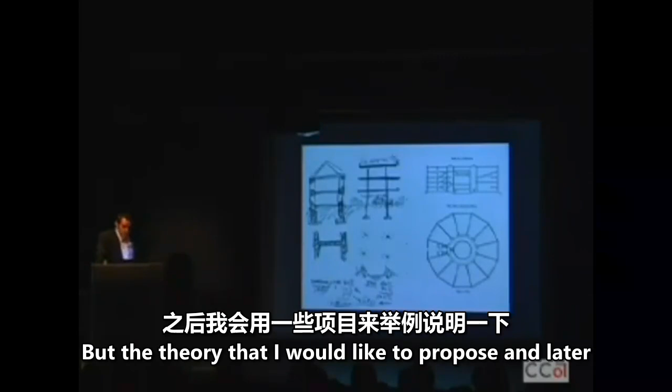But the theory that I would like to propose, and that later on I will illustrate extensively with the projects of the office, is one that if in the past the architects who were addressing some sort of political projects were relying primarily on the section and the plan as the architectural devices that establish contiguities, adjacencies, hierarchies, and so on and so forth in the society that the building is hosting.

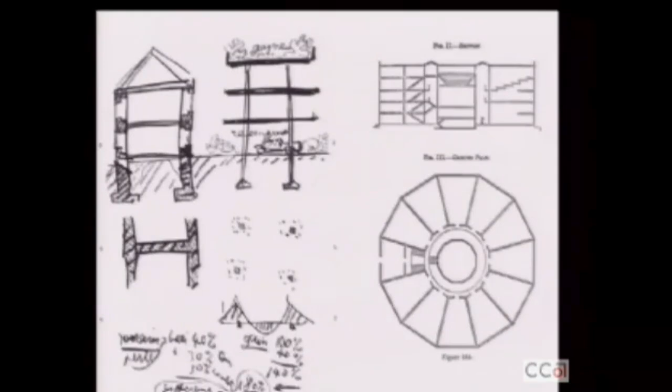My theory here is that in the near future the envelope is going to become even more important than these elements in terms of shaping, in terms of acting as a political agent. Why is that?

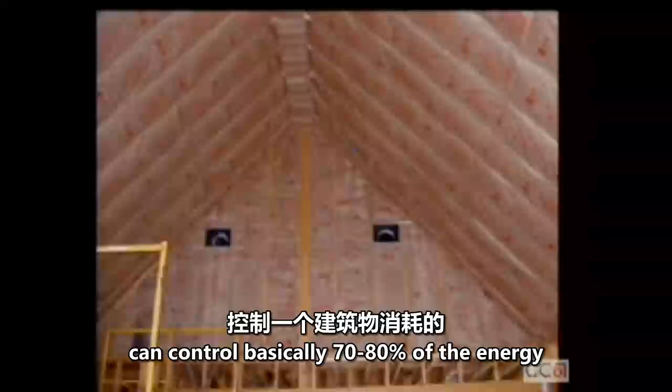Then there are other reasons why this element is important. Climate change. The building envelope regulates or can control basically 70–80% of the energy that a building consumes, and therefore it becomes a crucial decision in terms of how the building performs. The building envelope also has undergone in the last few decades a process of technical development that now makes very similar the technology that builds roofs and the technology that builds walls.

So where just a few decades ago you would use entirely different technologies for these two elements of the envelope, now you see that curtain wall technology or light metal cladding technology is increasingly an element that you use for the walls and the roofs, and so that means that perhaps we need to start theorizing and rationalizing this element as a whole envelope rather than as a facade and a roof or a facade and a silhouette, which is maybe the way in which it has been theorized in the past.

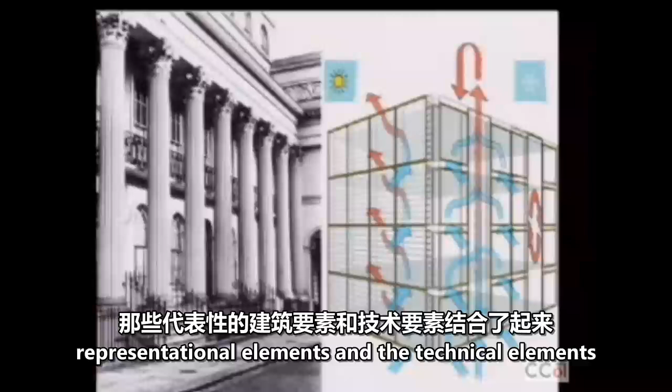Hopefully bring together those kind of representational elements and the technical elements that regulate this homeostatic membrane between inside and outside of the buildings to make a more general theory of the building envelope. So as a kind of structure of that theory, I will be using this classification to categorize the projects from the office that I will show later.

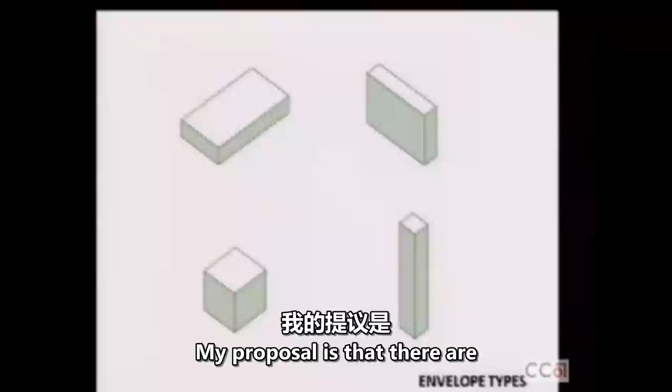My proposal is that there are 4 basic types of building envelopes, and depending on each one of these types, which are basically aspect ratios between dimensions of the envelope, they enable or they are more prone to engage on certain types of concrete matters with political significance.

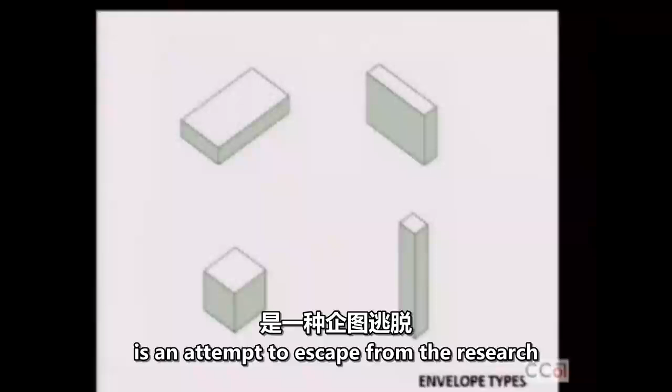And maybe I should say also the whole theory of the envelope is an attempt also to escape from the research on the pure surface, on the pure treatment of the skin, and start to draw relationships between the constitution of that skin and the wider problem of shaping the envelope of the building. So some skins are more adequate for certain types of envelopes, and so on and so forth. And so there are these 4 types, which I call flat horizontal, flat vertical, spherical, and vertical.

So I'm now going to move quickly to explain each one of them and possibly what are the main arguments, or the main possibilities that are predominant in each one of those types, using our own work rather than as an example, because I think that perhaps they are not the best example of what we can do with these different types of enveloping structures today. As a sample, I mean, I've discovered the subject by actually looking at the projects that were going on in the office, and I think as such they should be seen, not as examples of best practice in this future theory of the building envelope.

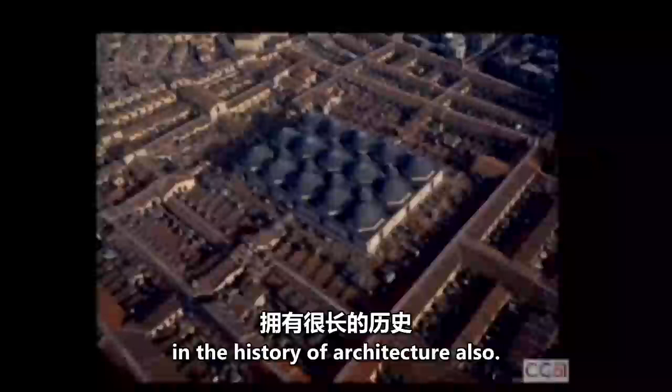So what is called flat horizontal, you all know what kind of buildings they are. They have a long history in the history of architecture also. They are sometimes also treated as a kind of utopian dream. But what I think makes them interesting as possible political or socially transformational devices, I don't know if that makes any sense, but as devices that we can use to transform reality, is that they are usually covering a large surface with a constant section which usually hosts movement of goods and exchange in a certain location, and that is a type of activity that is obviously central to the formation of communities.

At the same time, these types of envelopes are usually so large that they require certain ways of bringing daylight in and bringing natural ventilation in, and they are so large that very often you see that they swallow pieces of nature. I mean, it's not uncommon to see how people who design airports or shopping centers, which are some of the examples of these typologies, tend to replicate nature in a very picturesque way inside of those buildings.

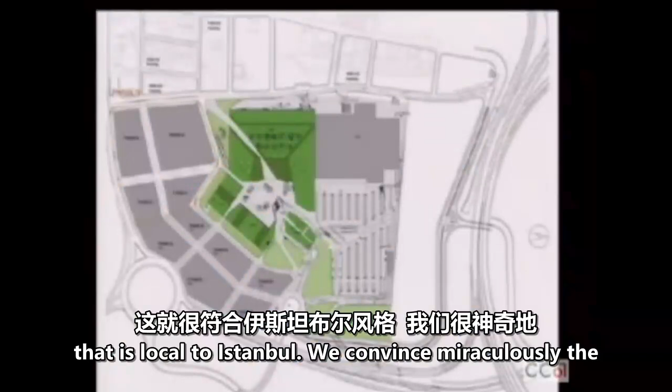We were going to merge with the camouflage, with the colors, the palette of materials that is local to Istanbul. We miraculously convinced the client to explode the box. There you see our building next to IKEA, to put the parking underground in order to lose that reference to the surface of asphalt that is customary in this type of development, and even to suggest the possibility that at some point the envelope breaks and maybe initiates surrounding fabric rather than remaining as an isolated object in the urban field.

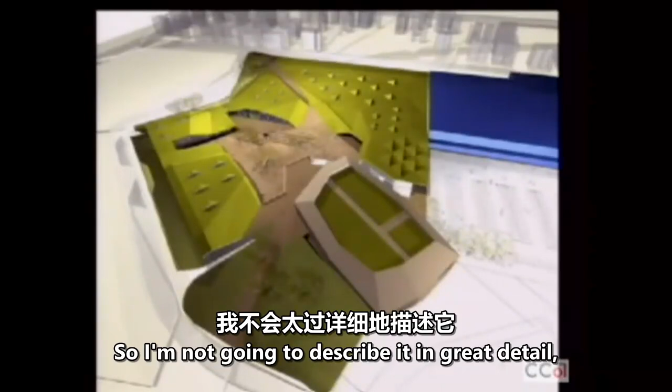So I'm not going to describe it in great detail. There are some of the first iterations of the project, where we were trying to activate also the roof, as I was saying before, as a device that will, as opposed to IKEA, bring daylight and natural ventilation inside of the spaces, but also as a device that can be used as a new park, as a new ground, and relates in different ways to the edges of the complex. So there you see the section of IKEA and the section of our building and what it does.

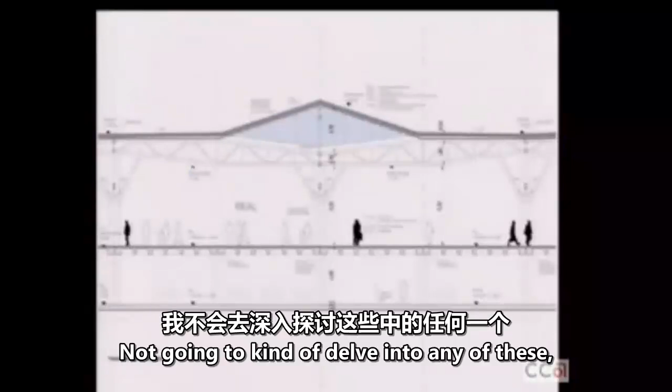I'm not going to explain the building. It's a very large building. Just to show you a few images of how the building is built with this very reductive palette of green and clay, and how the roofs become almost like a new park, and also how that new park challenges the definition of the horizontal, the ground. So by becoming closer to the ground, you are more able to challenge it as a cultural element. Not going to delve into any of these.

The issue of relating the natural and the artificial: the use of the skylights for natural ventilation and daylight inside of the building is also used as the device that generates the topography on top of the building, and this is how people use the areas on the building and the ground. I mean, these guys don't know it, but they are on unstable grounds.

Second project is a project that we are developing now in Birmingham, in the center of England, and this is a project that actually could be one of these non-profit projects that represent society, but the way it was given to us was absolutely perverse in the sense that the real project, which is the redevelopment of the station, is given to a corporate company that is doing it, and we are given about 5% of the total budget to wrap the building and make it look good.

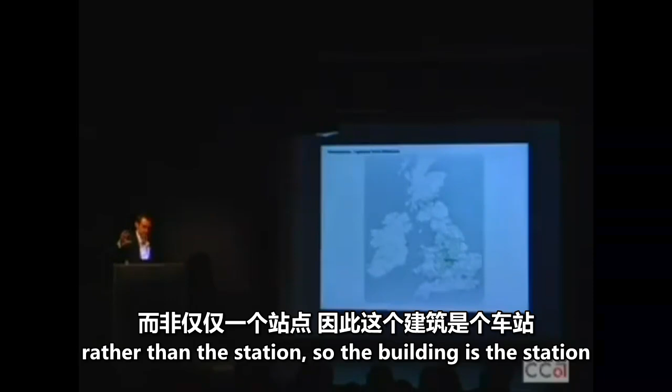So the building is a station, but the station at the same time is the symbol of this kind of transport hub, which Birmingham is. And so

This is not working. I can see it here, but you cannot see it there. Anyway, I think we can move on.

It looks as if the animations are not running, but basically what we did was to identify in the immediate field of the station a number of elements that were moving and were somehow related to that center of the city that is defined by movement, and try to see how we can make them part of the facade. And so those were the tracks; if you remember, the building is surrounded by holes because the trains are going underneath, and these holes need to be open. So there are trains, there are commuters coming in and out. This is one of the busiest stations in Europe.

Then there is information that is changing and can also be attached to the facade, and then there is an element: Birmingham used to have a famously black sky because of the steel industry and the bad weather in general, and now between heavy industry moving to Korea and other places and global warming, it has a kind of beautiful sky that we wanted to celebrate.

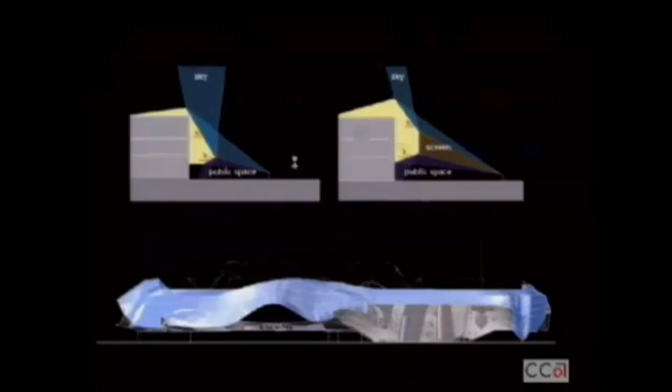So we made a number of sections. You see the blue things are the halls where the trains are located, and you see that every one of these sections has different distances between where the public is located, because sometimes you are looking at the station from beyond the hall in front of the station. Sometimes you are next to it, and so these conditions of reflection change from one section to the next. Sometimes it becomes very complex. Sometimes it encloses or embeds the screens.

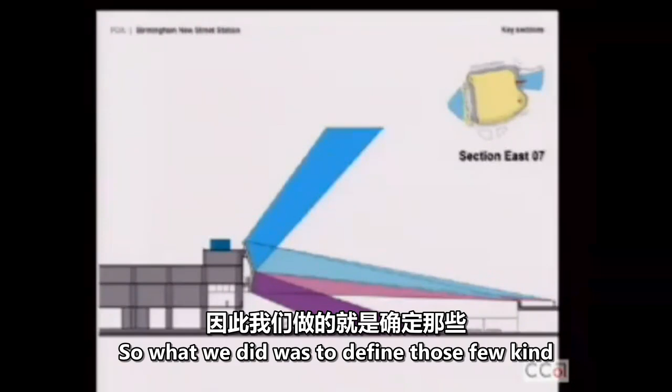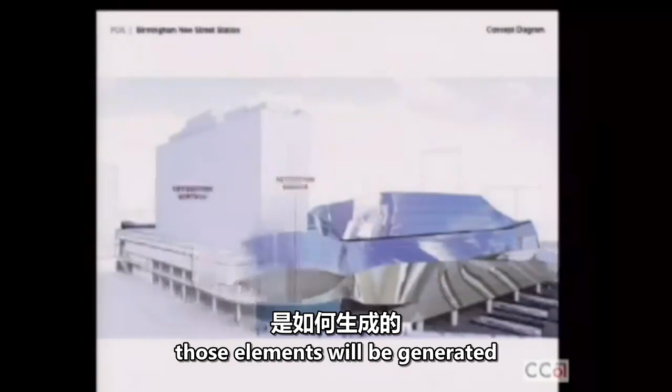So what we did was to define those few crucial sections, and by morphing them, we generate the skin that will represent, if you want, the building in the future. And so that is how that surface that reflects those elements will be generated and will perform in the future.

It's a kind of rain screen that is supposed to capture also the changes in light that occur in the center of Birmingham through the day, capturing the different solar conditions, but also artificial lighting, etc. So these are some of the images of this project as we imagine it will be. It is starting construction now.

And there is another animation here where you can see this idea of a kind of Koyaanisqatsi type of fresco, where you have the clouds reflecting and the trains moving and all these kind of things inside. Unfortunately, you cannot see it, but you can imagine.

So the second category is the spherical category. Spherical doesn't necessarily mean spherical. It means that it's a category of envelope where the three dimensions are more or less similar. I call it spherical in honor of Sloterdijk, who is one of the people who inspired this research.

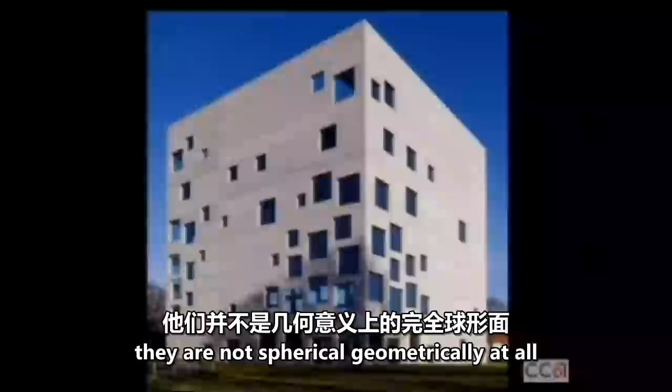So these are, for example, contemporary spherical buildings following my own theory. Sometimes they are not spherical geometrically at all, but you see that they have more or less the same dimensions in every direction. This is a typology that has been used often as a kind of ideal visionary typology, I think primarily because it doesn't really work unless you have massive air conditioning, because the relationship between the inside and outside is very tenuous.

And that's precisely what is interesting about this typology, and what possibly generates its potential in terms of representing or embedding a certain type of culture and possibly transforming it: just in virtue of its geometrical qualities, it has the lowest envelope ratio of all. If you divide the number of square meters of the envelope by the number of cubic meters contained inside, this typology is always lower than any of the other ones.

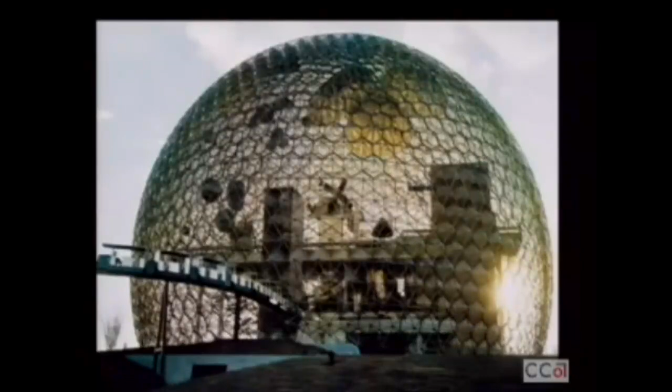And what does this mean? It means that the skin is much more independent from what happens inside than in most other typologies, probably with the exception of the vertical side of the previous type, where that kind of relationship is very tenuous.

But also because of the nature of these envelopes, normally they are public buildings. They are buildings that have a variety of functions. They are not just the repetition of a section on the ground to host a market or a retail center or the handling of passengers of an airport, or, for the vertical typologies, an optimal bay of space used for residential or commercial functions. You can imagine them as libraries or auditoriums, this type of buildings.

So they are buildings of public nature that usually require an additional level of concern with how the building represents and communicates what happens inside. So it's a type of envelope that has a very high level of request on a representational level and a very low level of request on an environmental level. And I think that its political potentials also have to do with those parameters. It's a typology that is often used by architects to play.

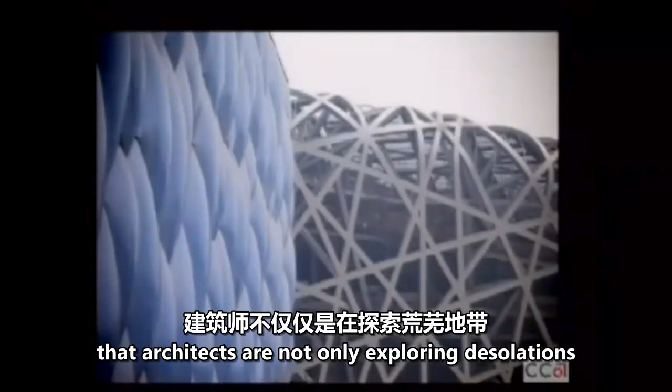It enables architects a great deal of freedom in terms of surficial experimentation, and so you see architects delving into all kinds of experiments that have nothing to do with the functioning of the building, but primarily with communicating the organization to the outside. In many of these experiments architects are exploring tessellations or technologies that probably didn't exist 20 years ago, or at least were not affordable, like silk screening, layering the functions of the surface in entirely new ways, using CNC technology to produce these tessellations and so on.

So what you see in all these examples is some sort of latent desire of architects, and probably of the societies where they work, of producing organizations that are consistent and yet differentiated. My favorite case is the Olympic buildings in China. You can see that invariably, no matter which architect works, it ends up with the same recipe for the envelope, a pattern that has a differentiated nature.

And think what that means in terms of political message. We are still able to do big projects. We are still one, but as opposed to the Mao years, where there was a kind of suit the same for everybody, we are becoming sensitive to differences, to individuals and so on.

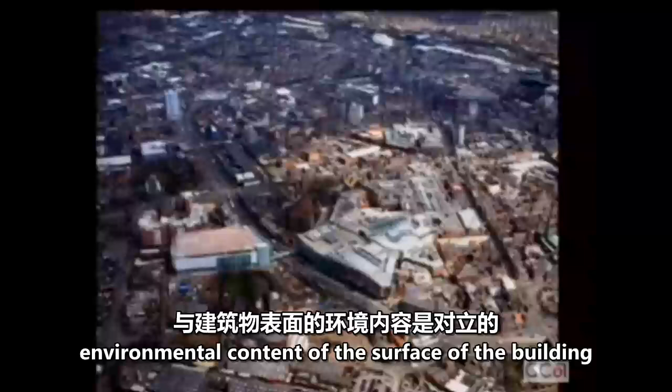They are buildings for profit, they are not public buildings, but two projects that we've done that have a research that has to do with this representational content as opposed to environmental content of the surface of the building. This is a project that we finished a couple of years ago in Leicester, also in the Midlands in the UK, where we had to make a cineplex and a department store as the anchor of a redeveloped shopping center, and we basically were given this plan.

We were able to kink the surface a little bit, but not very much, because they already had outline planning permission, and we were told to simply make these two functions there. We did design the structure and everything, but we didn't do anything. I mean, it's irrelevant. What happens is kind of correctly done by the office, but the brief of the project is so constrained that there is not much you can do inside of there.

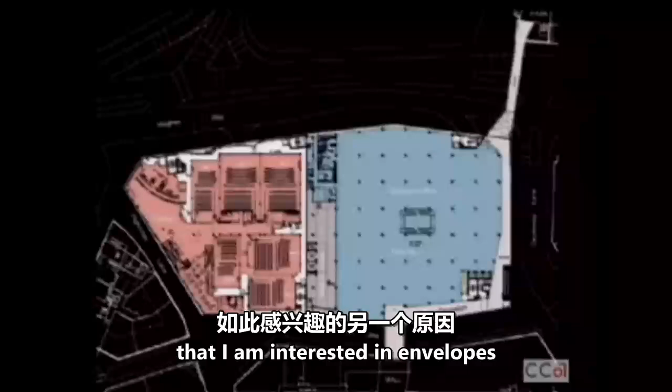And in fact, this is another one of the reasons why I'm interested in envelopes, because I identified it as probably the last domain where architects have some power. In all the other areas you get retail experts and cinema experts and housing experts and so on and so forth, and they know exactly what to do, so there are very limited possibilities of operating with the plan and the section as architects in the past did in order to transform reality, and we are now constrained to the skin.

So in this case, the argument was, okay, there is John Lewis, which is a kind of generic British department store, and an American cinema operator who have to occupy the building. But what we wanted to do was to relate the skin to some of the historical contents of the city of Leicester, as one of the important cities where there was textile industry in the 19th century. John Lewis is also a company that has a long tradition of hosiery and lace. So in a way, we turned that into the message that the skin was going to convey.

And so we managed to convince the client to do this kind of very expensive skin. It's a cheap project, but in this case it turned out to be expensive: 2 layers of silk screen glass with a drawing that was selected for its geometrical qualities of coverage, a geometry out of the archives of John Lewis. And then we redrew it in order to make a number of tiles.

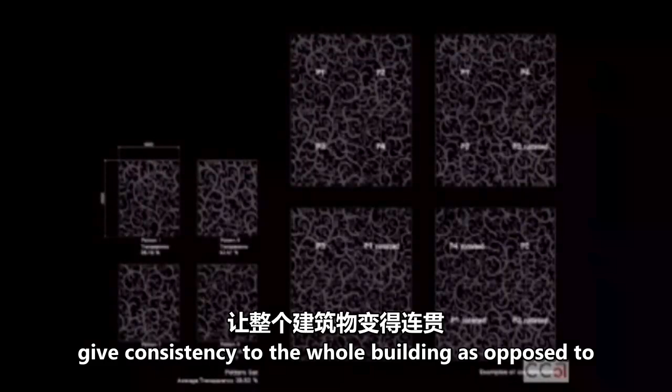It is 8 tiles that by mirroring them would enable us to first give consistency to the whole building, as opposed to what happens normally with these buildings, which are blank envelopes where the architects are usually forced to make a kind of collage, like you paint this blue and you paint this gray and you paint this yellow, and the whole thing looks a little bit like the scale of a city. Here it was almost the reverse of that. We turned everything into a single floating lace box, and then we differentiated.

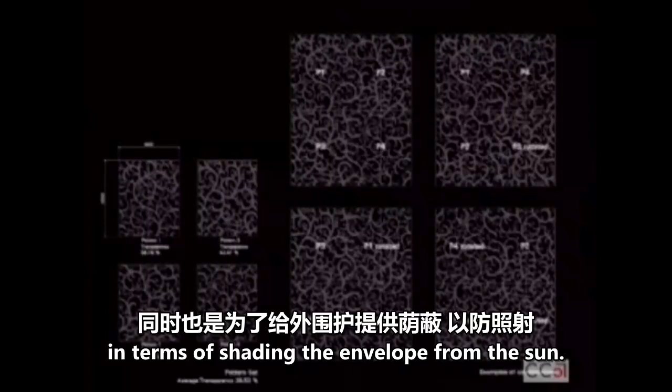We differentiated in order to provide areas of higher and lower transparency, both for the visual relationship between inside and outside, but also in terms of shading the envelope from the sun. So you see, the pattern is manipulated, and by this manipulation we can provide more or less density, and it is shaped to kind of embrace the heads of the people inside. This looks silly, but it is not, because when you look from inside, you see through at the height of your head, because there is an overlap of the 2 patterns. But when you look from outside, you see that the 2 patterns overlap, so the view is obstructed. This is how this facade works.

So in a way, here the pattern challenges the unitized system of the facade with this silk screen lace that can adjust different densities. And so these are some photographs of that envelope, which, because it's mirror frit, sometimes picks up the neighbor, sometimes reflects the sky, sometimes becomes more opaque depending on whether the sun is or is not hitting it, and at night produces these sorts of lace effects as if it was a kind of Chinese lantern that changes color.

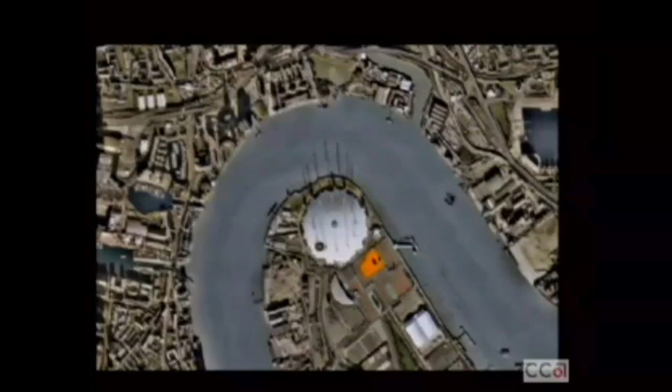Second project on this category of spherical is a project that is now under construction in Greenwich, in front of the dome, in that orange area, and it's a building that looks like this. It's a School of Design and Communication, and it's a building that is located in front of the dome, and it has to adjust to a kind of crescent-like urban regulations surrounding the dome, which we turn into kind of kinked, jagged form that works better with the function of the school to happen inside.

But I think what is interesting in terms of this discussion is that because of that position right in front of the dome, which is a massive blank object in the field, we started thinking from the very beginning in the possibility of doing something that almost doesn't look like a building. It looks also like some sort of container, and being the school part of the arts and crafts tradition, we thought that maybe a possible idea would be to use wallpaper as an envelope, kind of these floral wallpapers of William Morris.

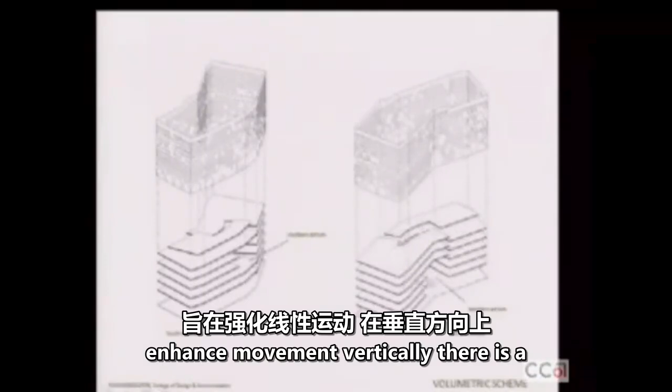So the building became that container that was largely dictated by the local regulations. There are some interesting things in the section because we have a system of split levels that is aimed to enhance movement vertically. There is a sequence of atriums, but we are not going to talk about that. We are going to be focusing on this idea of some sort of silo, wallpaper silo that contains the school in front of the dome.

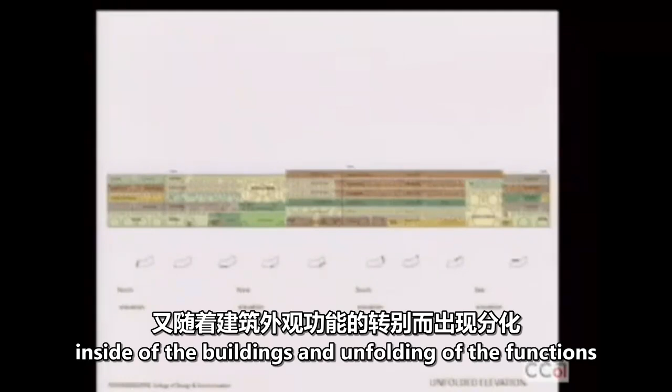And again, this latent desire of all contemporary architects of differentiating buildings. In this case, the pattern of fenestration is differentiated following the different functions inside of the building. It's an unfolding of the functions attached to the facade.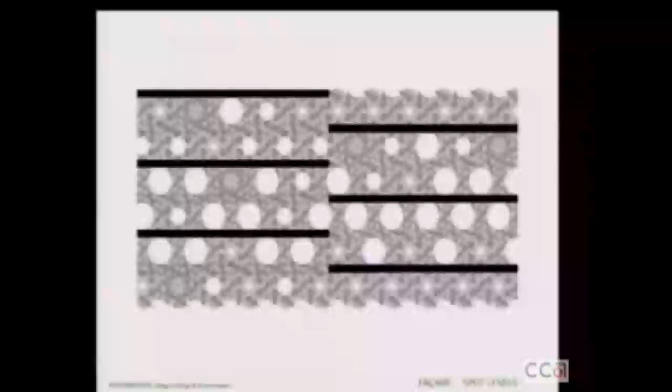So you see also that there's a challenge to the conventional type of spherical envelope. In this case, what we are doing is to try to reconnect the inside and the outside, to use this membrane not as something that is a kind of free floating representation, but on the contrary is something deeper that relates to the programs and to other issues you will see later on. So this is a split level system that produces a double fenestration inside of the studios. This is very much like an architecture school, except there is not a lot of architecture, but similar things.

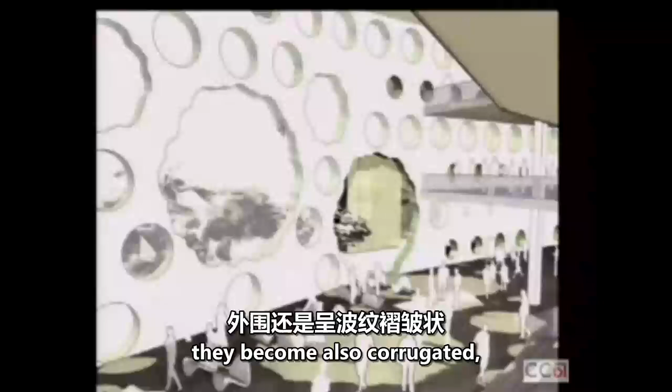These two levels of windows are able to change in order to provide the flexibility of having different types of perforation of the envelope. You see, when the windows become larger, they become also corrugated. You will see later on why. Because of this. These are the floral tiles, the floral petals in the wallpaper, but instead of replicating nature, they are made with this non-periodic, non-regular tessellation invented by a British mathematician called Roger Penrose, that allows us to cover the field just by using these different tiles.

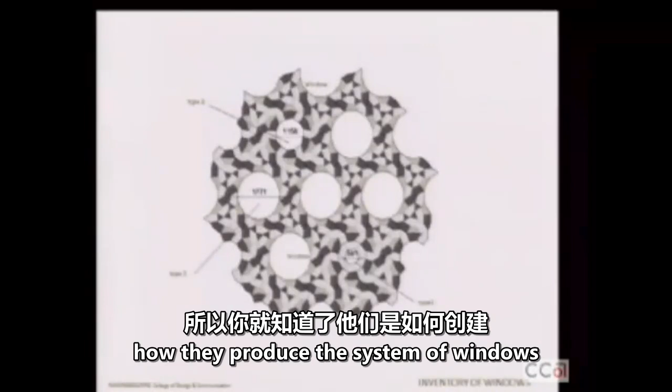And so you see how they produce the system of windows that make the building, and why, when this becomes larger, the edge of these roses becomes dictated by the tessellation system of the envelope. And you see what they do in section, and what is interesting, I think, about the system and how it links the ornamental quality of the skin with the function, which is dictated basically by the size of the window and by the position of the section.

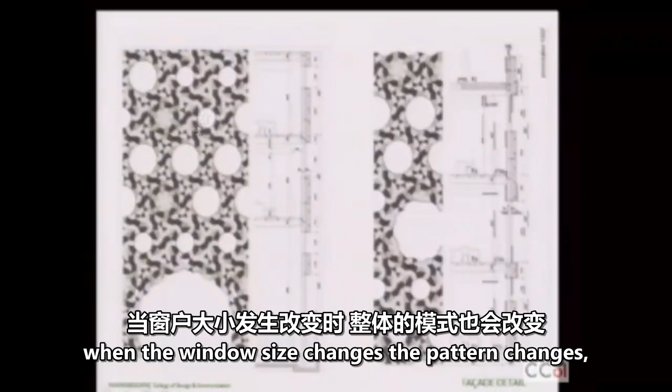You see the section always including two sets of windows, but you see that when the window size changes, the pattern changes. So the pattern is different around here, and this occurs automatically when we color code every one of the tiles in respect to the polar center of this polar array, these roses around every one of the windows. So this is what happens. You see how the pattern changes as the window size changes. This is a one-to-one mock-up to test the facade.

Next category. Are we already running late? Very late? We're okay? Okay, sort of okay. Okay, if it becomes really embarrassing, let me know.

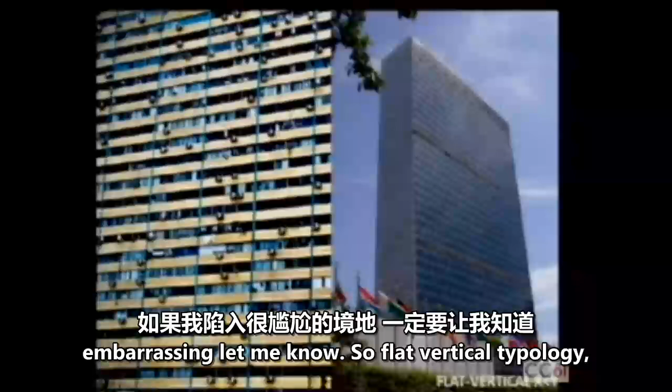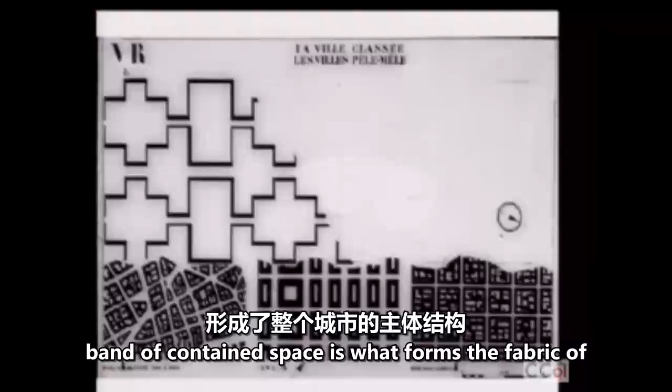So flat vertical typology, you all know this type of buildings. They are buildings where there are two dimensions, one of them vertical, that are much larger than the other one. The fabric of the city, basically after the Enlightenment, is built with this typology, which replicates and optimizes depth of space for whatever functions are required, and the repetition of that and the configuration of that band of contained space is what forms the fabric of the city.

And that's, I think, one of the first important potentials of playing with this type of envelope, which is how the envelope relates and defines public space, and how it distinguishes open public space from private public space, for example, in the case of traditional cities. You can see interesting examples of this. What happens when this envelope is used by the welfare state in Europe? This is Toulouse-le-Mirail.

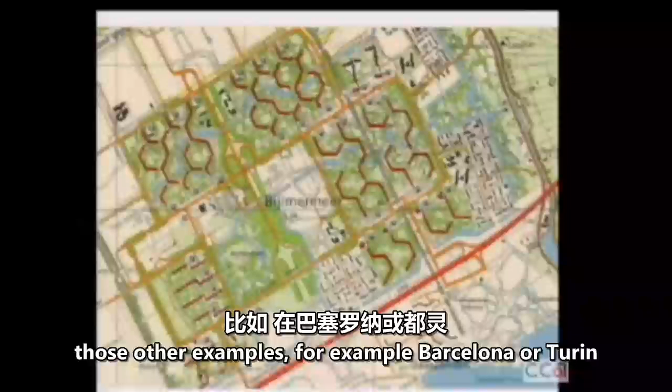You see the blocks suddenly have no front, no back. The public open space has occupied the whole ground of the city. I mean, some of these things in Bijlmermeer are doing the same thing, as opposed to those other examples of, for example, Barcelona or Turin, where the block is actually dividing the public space from the private open space.

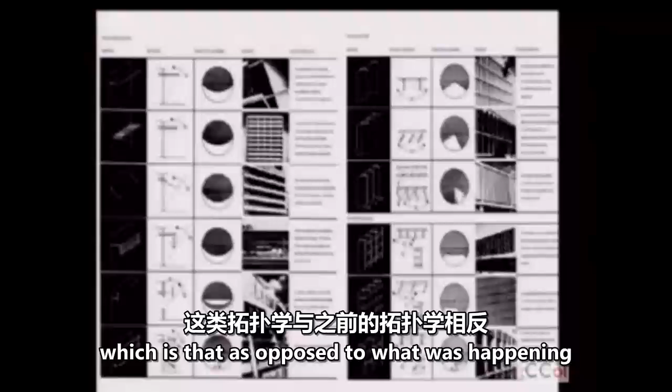So I think that this is, first of all, one of the most powerful things we can do when deploying this typology, which is to consider how it relates to the space of the city. But this typology has also another very interesting potential in terms of transforming the society that inhabits it, which is that, as opposed to what was happening in the previous typology, where the skin is basically independent, in this typology, the figuration of the building and the environmental performance coincide or collide in that

superficial envelope. So as opposed to the previous ones, here that is a very active skin that regulates the climatic exchanges, and at the same time it is also what makes the face of the community, and sometimes represents very directly what that face does, sometimes insisting in the independence between the cells of the individuals that compose the building, sometimes insisting in the industry, in the system that produces those envelopes.

And lately you see again all these experiments trying to show that the communities that inhabit those envelopes are differentiated, are not just exactly the same. I mean, you see examples like this, where that is very intentionally deployed. Almost, I think today it's impossible to do a building that is totally repetitive, because people will understand that it is politically incorrect. So how that differentiated skin relates with climatic conditions and so on and so forth, I think is a very exciting field to explore. And we explored it in a housing block that we built in Madrid, in the outskirts of Madrid.

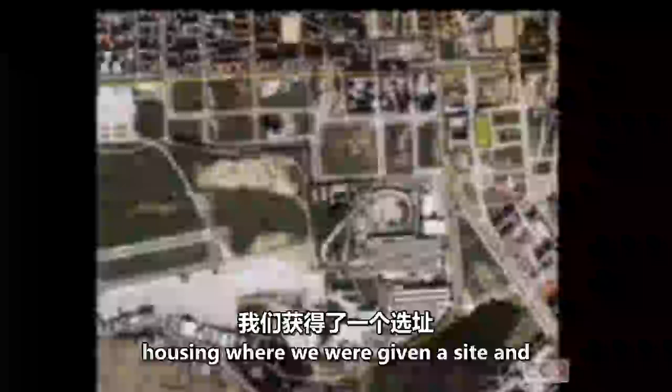This is kind of very cheap social housing, where we were given a site and we decided to concentrate all the FAR in one side of the site, so that every unit will have a view of a private garden and a public garden on the other side that existed there. So in order to do that, and we had a kind of limit of height, we needed to resort to a very deep space, and that gave us the idea that maybe because we have a very low facade ratio, we can try to produce social housing made out of glass.

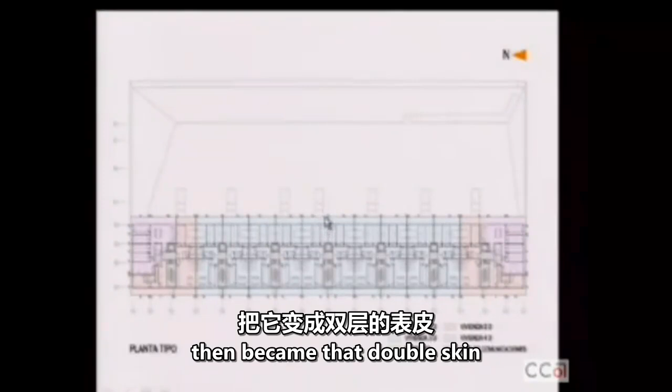But then realizing that we were in Madrid, and that the building is oriented north-south in this direction, so this is east and west facade, we needed to introduce some kind of solar shading device that then became that double skin, which produces terraces for every unit, and acts as a kind of climatic buffer. You also see that the units have double aspect, so that enhances cross ventilation, etc. So these are the units. We are not gonna look at them.

This is the skin, which is based also on some sort of local shading device that the windows in Madrid have. But the particularity of this experiment is that these windows are going to be made with bamboo or some sort of local variety of very cheap material, which produces this. So this is the finished project, and what is, in my opinion, more successful about this is that it doesn't have to resort to this type of collage. Like, here you see where architects have to invent all kinds of things to escape from regularity.

In this case, everything is consistent, everything is regular, and yet the fact that people move the louvers differentially to accommodate to their desires produces that changing and differentiated picture of collective desire on the facade. That is not just a picture, is not just a collage, but is produced by actually having some kind of environmental performance. These are simply these terraces wrapped in bamboo when they are open, when they are closed.

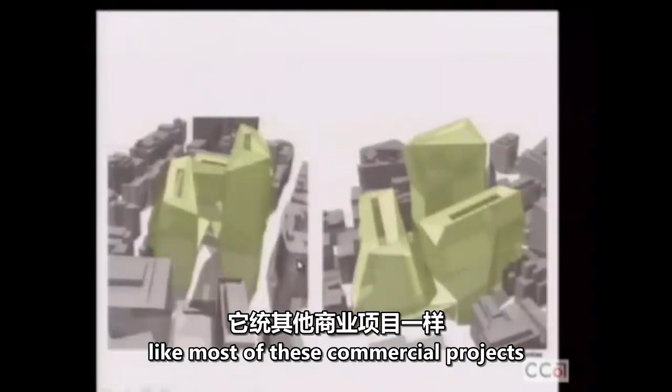The other project that I brought very quickly is a project that we designed in the city of London, in this location here recently, and is now on hold, like most of these commercial projects, waiting for the credit to come back. But it's basically 3 central core buildings, very conventional office buildings that for different reasons, for view corridors and daylighting conditions, shadows being cast on the neighbors, adopt this form, which is a kind of crystalline form. It's like 3 little jewels in a cluster with this form.

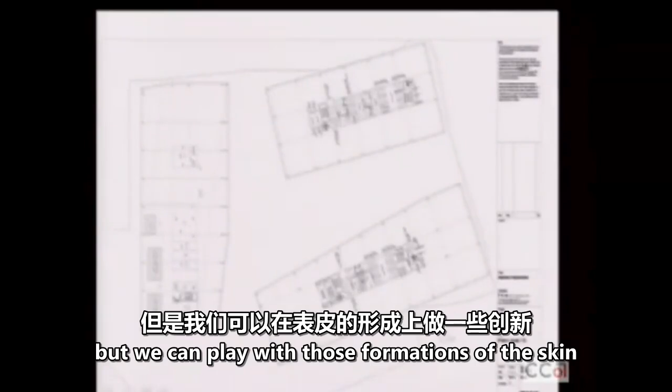So what is interesting about what we did here with the envelope, these are some of the plans. You see, it's a relatively, again, conventional inside. There is nothing we can do there. It's a commercial project. We cannot change, but we can play with those formations of the skin in order to produce the architectural expression of the project. But not more than that.

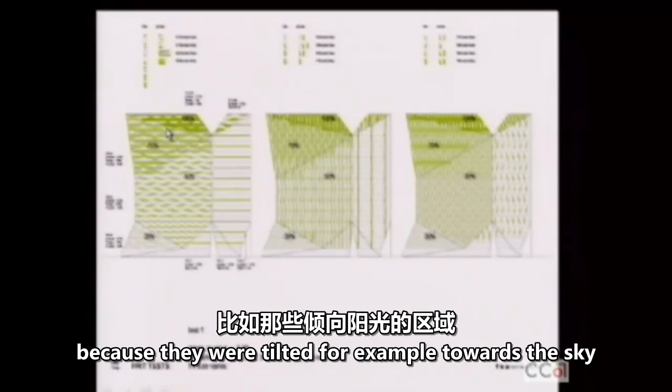This architectural expression, because it's crystalline, it had to be glass, but glass is now a material that is not quite sustainable. So we needed to think about some sort of solar shading device. So we asked, there is one slide missing, but we asked Ove Arup to measure how the sun will hit the different faces of these faceted surfaces, and so they gave us areas that had more solar exposure because they were tilted, for example, towards the sky, and some areas that were to the north didn't really need much protection from solar exposure.

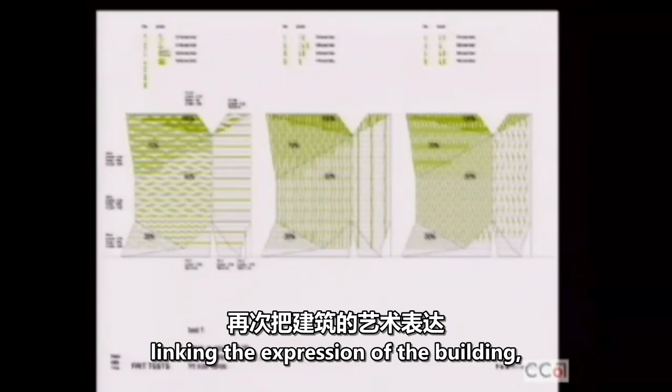So what we did was to devise, in this case, three systems of tiles that are fritted following a pattern, but there is only a discrete number of them that produce again that picture of differentiation, again linking the expression of the building, the expression of differentiation in this case, which is this kind of political, unconscious desire, with an environmental performance of the skin. And so those are those buildings, and this is how the skin would be patterned differentially by this system.

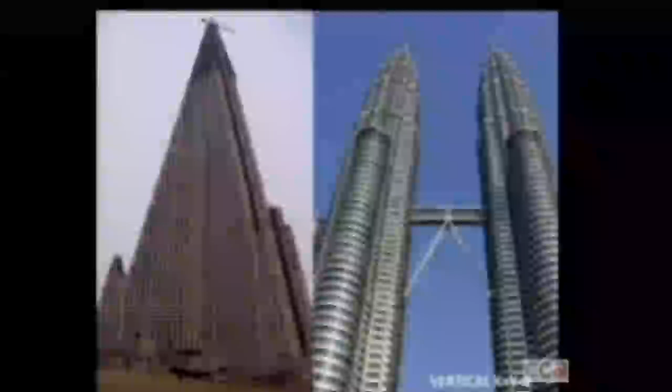Okay, last category, if I may, vertical. I think what is interesting about this category is that friction between the environmental performances of the skin and the representation of the iconographic performance of the building is at the maximum. So these buildings have the most dominant presence in the urban skyline, but at the same time those skins are the most expensive, the ones that have to perform best because they are very expensive.

So the kind of play between that kind of approach of vertical envelopes, which we see deployed everywhere, where basically conventional buildings are recovered literally with images that try to connect with different meanings, with different iconographies, local iconographies, versus this typology of vertical envelope. This is Hong Kong, where you probably remember to have seen these very corrugated skins of the envelopes that had actually absolutely no meaning, no representation. This is how these things look like in plan.

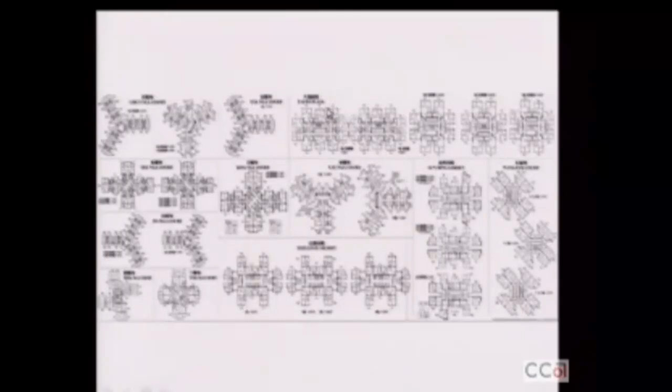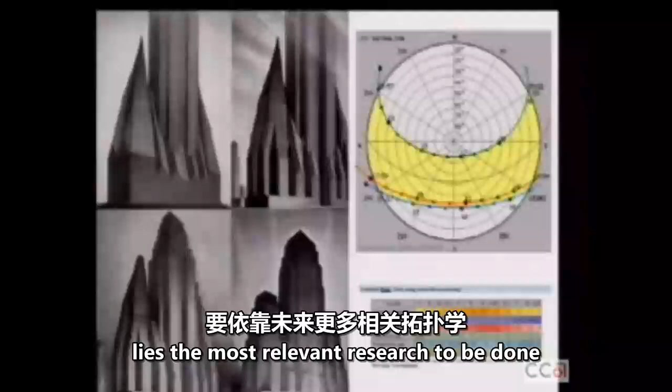So this type of relationship is where I think maybe lies the most relevant research to be done with this typology in the future, which is how to move from the paradigmatic prototypical image of the tower to a vertical envelope that actually relates to all these climatic performances. The tower by nature is one of the building types that is most exposed to the sun and to the wind, and that also casts shadows on the surrounding field.

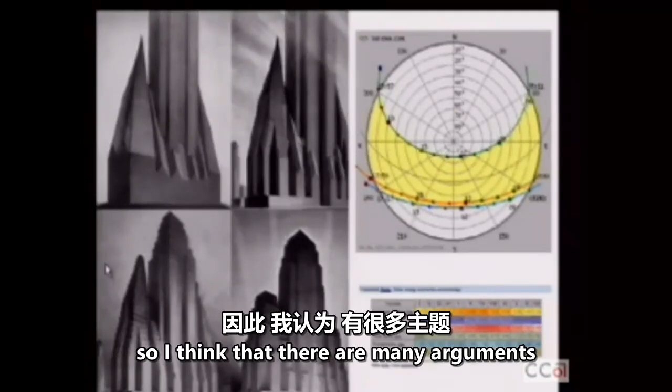So I think there are many arguments that we can use to produce a kind of anisotropic typology of towers. This is some of the research that we've done in the office, where you can see that the facade ratios in the UK and the facade ratios in Malaysia or Hong Kong are substantially different. So again, that gives you an indication of the relationship between the skin and the space that is contained inside of the building, and how that produces an entirely different expression of the building. Look at how these buildings work, and look at how these more Western type buildings work. I think there are cultural reasons for this differentiation.

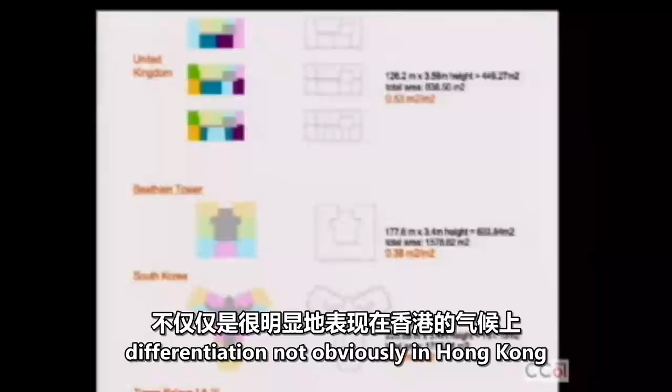Not obviously, in Hong Kong, the climate is perhaps more humid, but I think that the main reason for these differences between some towers and other towers is cultural. In Southeast Asia, people living in high-rise buildings are still not accepting that they are living in an artificial environment, and so they shape them to obtain the same domestic environments that we can see in low-rise buildings. So, things that one can mobilize when playing with vertical envelopes.

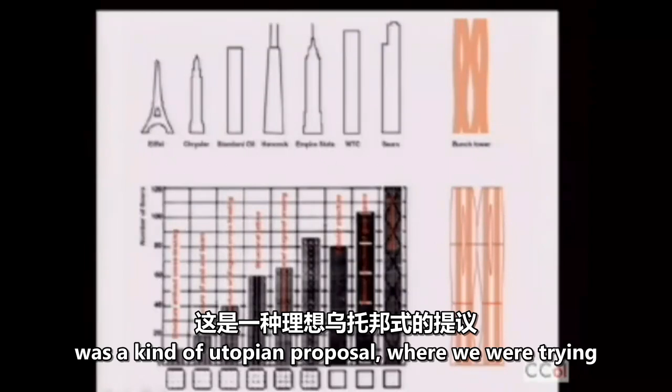One of them is the structure. This is a diagram from our proposal for Ground Zero for Max Protetch, which was a kind of utopian proposal where we were trying to propose the building as one more step in the evolution of high-rise typologies.

So we shaped the envelope trying to mobilize this kind of diagonal nature of lateral forces in the building, which basically produce also internal effects, but also related to other representational contents. I mean, all these images are also part of that idea of making the envelope represent certain, convey certain messages. So you probably have seen that there is a kind of thread through all these examples in which the representational becomes reattached to the functional,

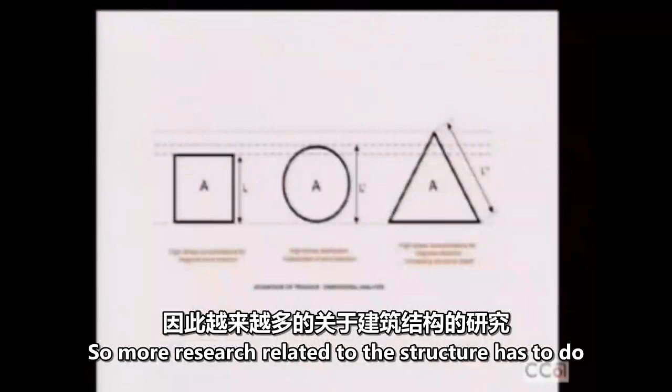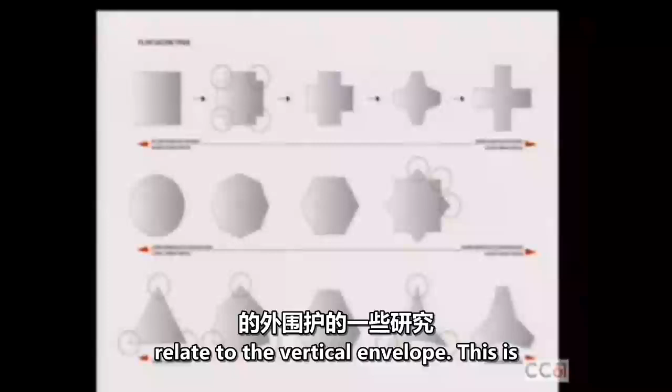as opposed to being more independent. So more research related to the structure has to do with how the envelope acts structurally, and the surprise of discovering that actually the mass of the building, the geometry of the footprint, has decisive effects in the performance. This is the same area, and this works much better than the other two, for example. This type of experiments is also some of the research that we are doing

that relate to the vertical envelope. This is part of the research that I've been developing in Princeton, and that relates to all these subjects. It is a proposal for an atlas of ideal footprints, high-rise footprints, and it's something that we developed by looking at climate data and looking at solar exposure of different types of envelopes, and by using programs to play with different types of plans.

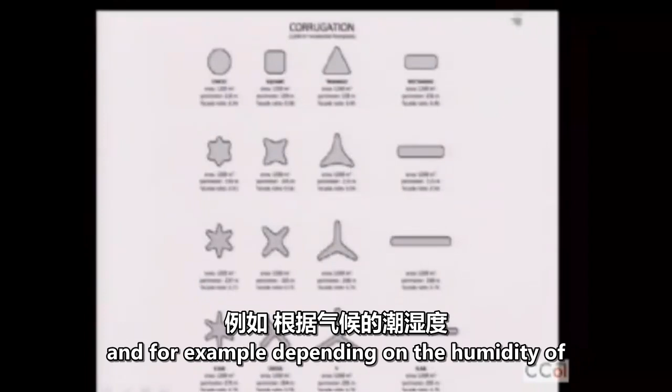So the idea is to propose like a manual where high-rise buildings are not just contingent ideas of architects, but are actually having very specific performance in certain latitudes, and, for example, depending on the humidity of the climate or the degree of tolerance to artificial environments of the population, those basic forms corrugate, and so the students managed to develop this map of recommended footprint types worldwide.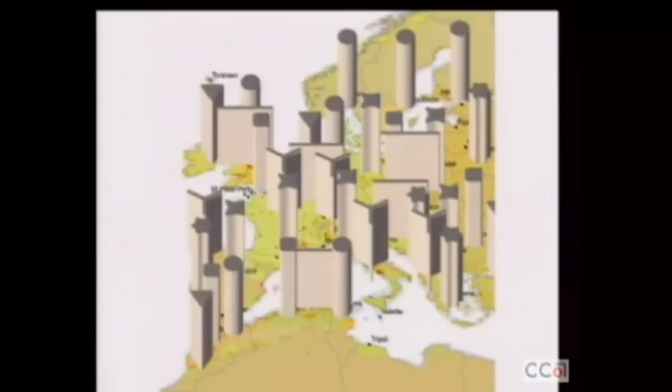It's a kind of megalomaniac project, but I think quite interesting, as a kind of critique of the star architecture of high rises, doing whatever whoever wants to do at a certain time. Very quickly, three examples, and I finish with this, of how we in the office have used these climatic ideas in the design of high rises.

These two towers are now under construction in Busan, in South Korea. They're residential high rises, but you can see that idea of corrugation being explored not only in plan but also in section, by trying to introduce these kind of spaces as conservatory spaces on the section of the building. And what is maybe more interesting for our discussion of this building is to see that in Korea, again, the relationship between the form of the building and the cultural

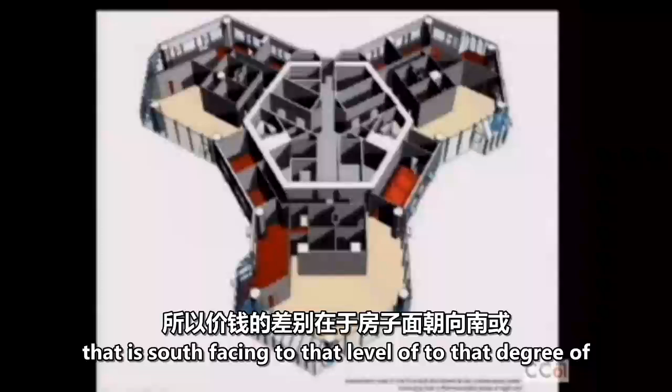performance of the building is remarkable, because in Korea there is some sort of cultural worship of the sun that means that if this is an apartment that is north facing, it will cost half of this apartment which is south facing. To that degree of difference between south facing and north facing apartments. And so you see that immediately the tower becomes anisotropic, becomes oriented, because in a cube you have only one south-facing side, two that are east-west, and one that is north, depending on the orientation.

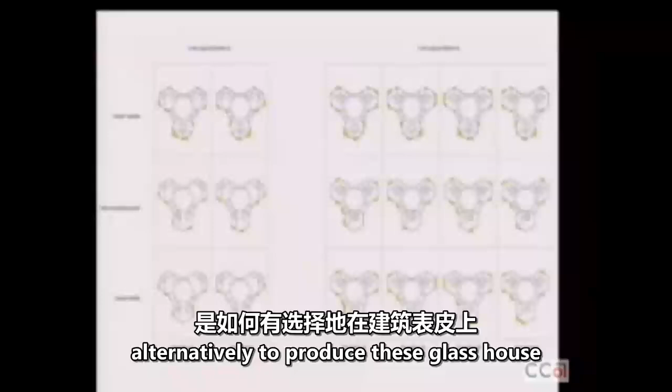But obviously, a form like this, if properly oriented, a triangular form, provides much better performance in terms of solar orientation, and this is how the skin is then corrugated alternatively to produce these glass house conservatories on the skin of the building.

The second project is in Kuala Lumpur. Kuala Lumpur is a city that is nearly on the equator, where we have also been commissioned two residential towers of exactly the same height as the other ones. But you see that in this case, the towers are elongated and ideally oriented east-west, because that means that the narrowest facades are the ones that are exposed to the sun. In Kuala Lumpur, you don't want to be exposed to the sun.

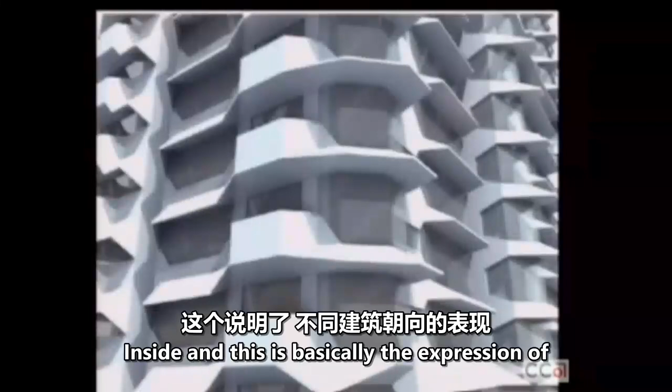And on top of that, we also explored as an expressive trait of these envelopes things like this, which are part of the local language of architecture, trying to protect from the sun. So we make a menu of canopies protecting the facade from the sun, depending on the rooms inside, and this is basically the expression of these differences of orientation and function on the facade of the building.

And the last one is a hotel that we designed and is also on hold, on the northern location in Spain, where what is interesting is that the sun is also important, culturally speaking, but in this case the views are to the sea. So you have a condition of views and sun, not like in Korea where it was coincident, but in opposed directions, and so that leads us to use a round plan, then with a number of corrugations that I'm not going to explain very much.

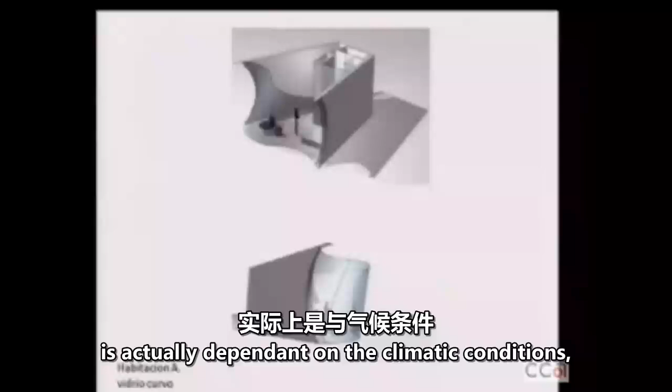I just wanted to show you how the basic form of the building is actually dependent on climatic conditions, views, and also cultural preferences. This is a kind of derivation of this project in Seoul, actually, where we have the same problem of views to the river on one direction and sun coming from the other direction. So there are different iterations of these circular plans.

And this is the last project. I had some other things, but I think I've already exhausted the time. So there is no conclusion to this. It's kind of a sudden death lecture, because there really is no conclusion. It is a kind of ongoing research. And hopefully in a couple of years' time, I'm targeting to make a manual of the contemporary building envelope, and then I can come again and tell you what the results are. Thank you very much for your attention.

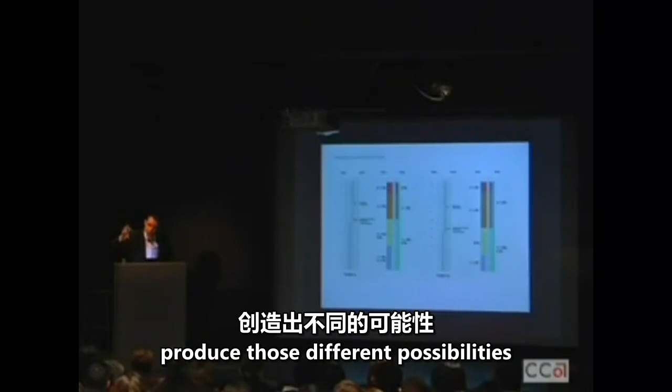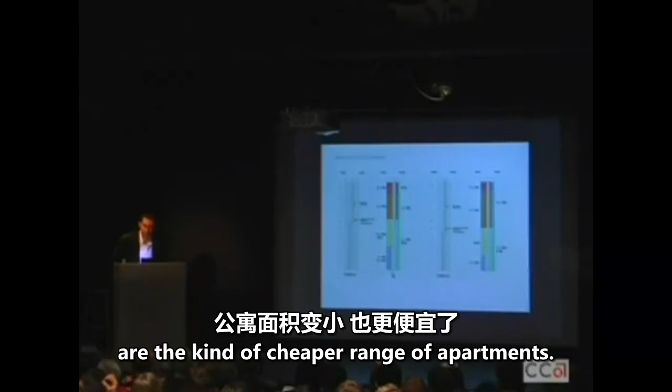So, by definition, we are supposed to locate different types within the towers, and in this case, that is what we try to mobilize in order to produce those different possibilities within the building and to express them, rather than having a constant envelope with always the same terrace. Of course, you can also say this is not very politically correct, because you see the biggest penthouses at the top, 5 plus 1 bedrooms, 4 plus 1, and as you go down, they are the cheaper range of apartments.

This is something that probably, if we had real power, we could challenge. At the moment, obviously, you will be fired immediately if you propose it. So we choose to be pliant and yet try to express that differentiation in the section of the building. So you see that the tower is not straight, but it has these slight movements that play with the corrugation as a kind of expression of difference. But it's very difficult to challenge some of the structures that you get with these commissions.

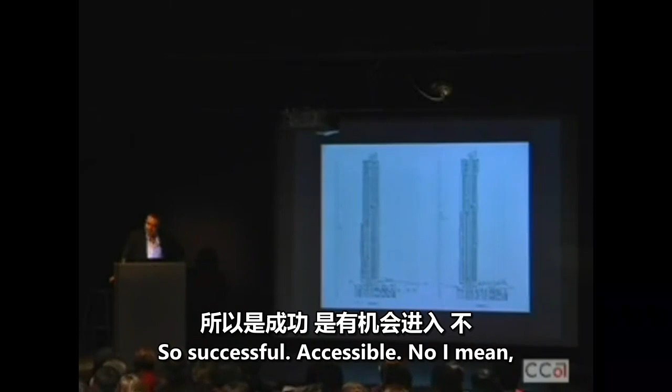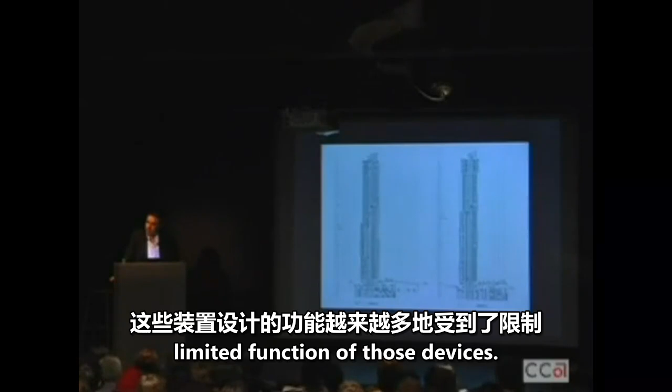No, I mean, I'm still very interested in the whole thing of the diagram. It's just that when you shift from more of a speculative practice or an emerging practice to a practice that provides architectural services, that makes buildings for clients and commissions, there is a more limited function of those devices. There is still a function, and it's still something that is somehow at the back of our minds. But let's say you don't have time to get a diagram and develop it and complexify it and extract an architectural expression out of it.

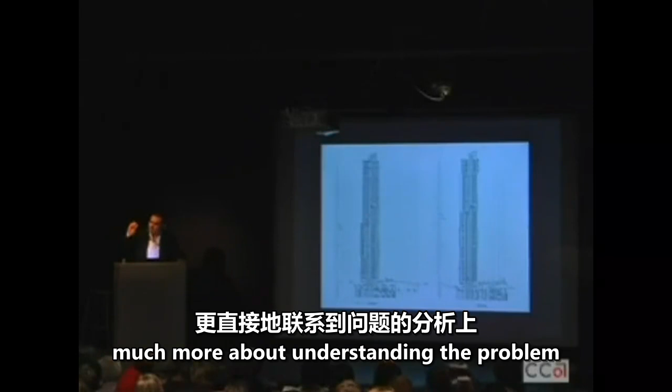You act in a much more... It's not that these drawings have no diagrams. I'll just show you one, for example, that shows the distribution of space in the section of the tower and how it becomes embedded in the form. But the research becomes much more immediate, much more about understanding the problem, producing more or less a certain organization, and then mainly concentrating on the resolution of the geometries of those envelopes.

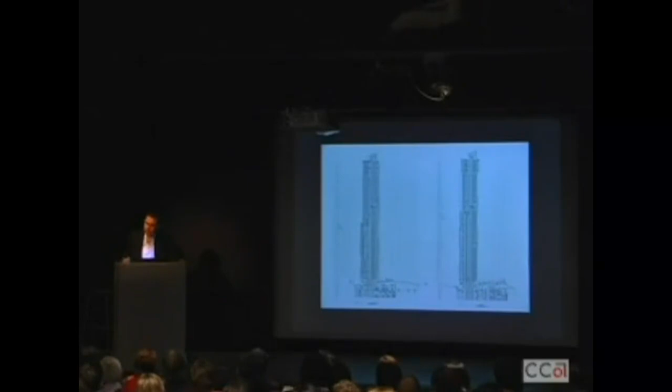So it is something that is not as much part of the work that we are doing now as in the origins, and not because I think it is irrelevant, but because we've moved to a different operation, where the diagram is perhaps less effective.